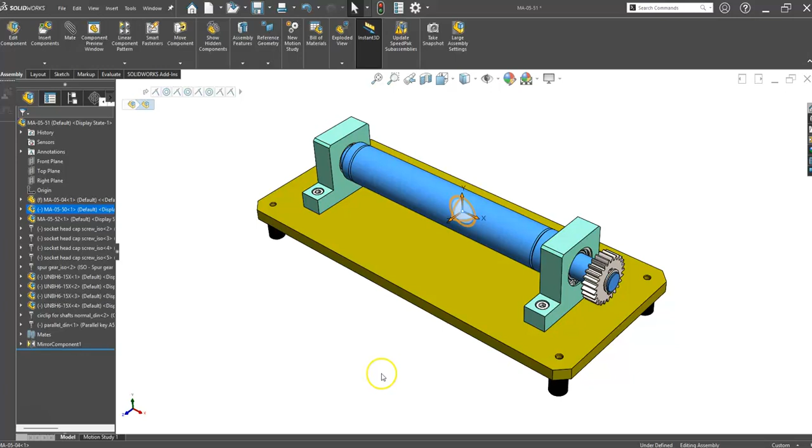Okay, we're looking at modeling up this full assembly here. First of all, we're going to start with a sub-assembly, which is going to be the roller, and go from there. So we'll start a new file, new assembly this time.

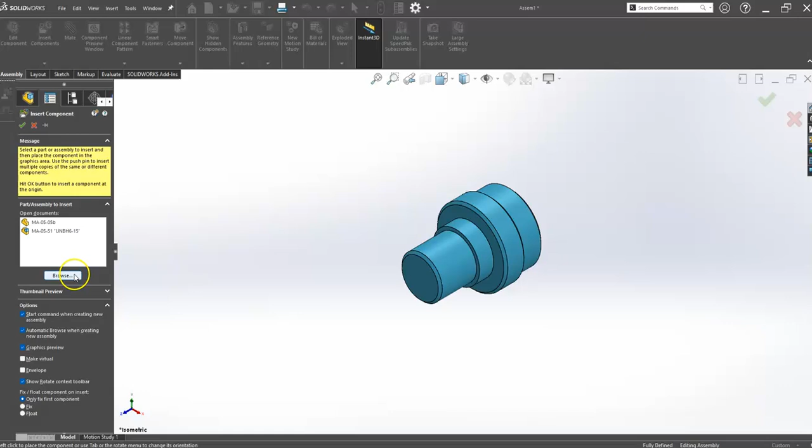And what we're going to do here is we're going to take in the components we need. So we can browse the new components here, and we're going to take in the two shafts that we need. So we're going to take in an end shaft. Just hit enter. We insert another component, and this time we're going to take in the roller that we've drawn.

So we don't have to rotate or anything, we're going straight into the mate. So the first part's in, and we notice there's an F in front of the part, which means the part's fixed, so it's really our reference part. So now we can mate the cylinder and the cylinder. Fine. And then we want to get our depth here.

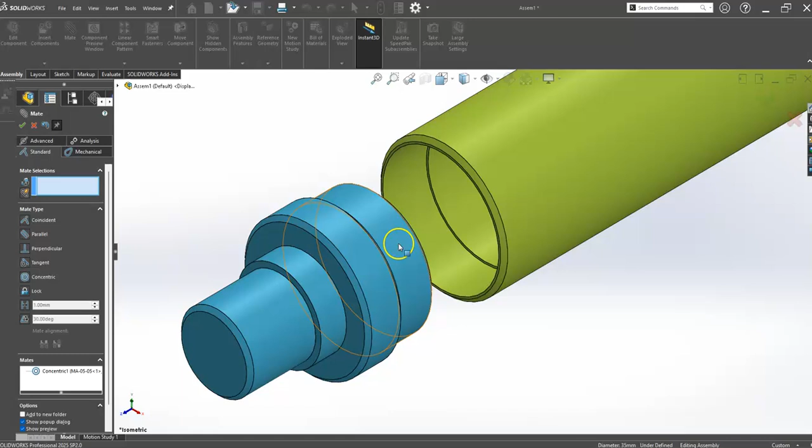So we have this part already prepared with a chamfer for welding, so we're just going to do the flat face at the end, spin around the stub shaft and pick the flat face there as well, and we're going to hit OK, and we can see now that they're butted up against each other with a bevel prepped for welding. So that's the mates completed for those two components.

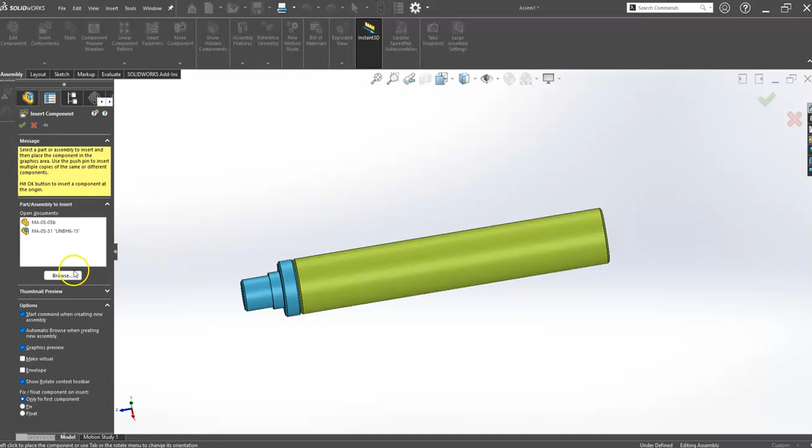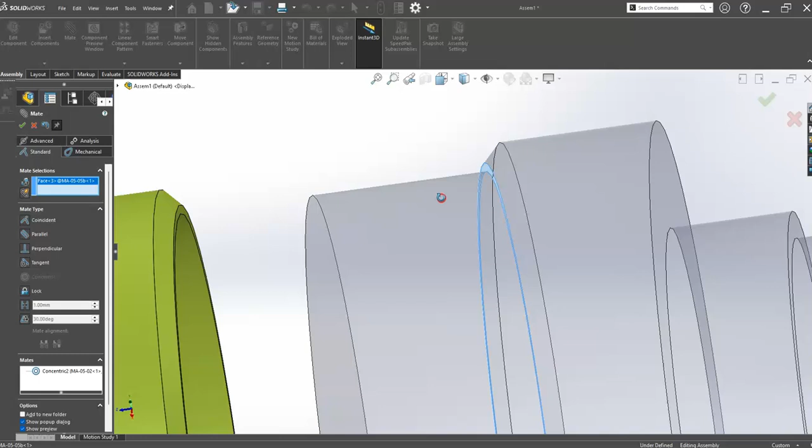We're going to take in the other shaft we drew a minute ago, so we insert components and we'll hit browse, or we can pick them off the list. This list here will be the parts you've opened, so you might see the part appearing there. So we'll use that part there. It's grey at the moment. We'll use our mate again, and again cylinder to cylinder, and we'll hit OK, and then flat face here at the back to the flat face of the roller, and OK.

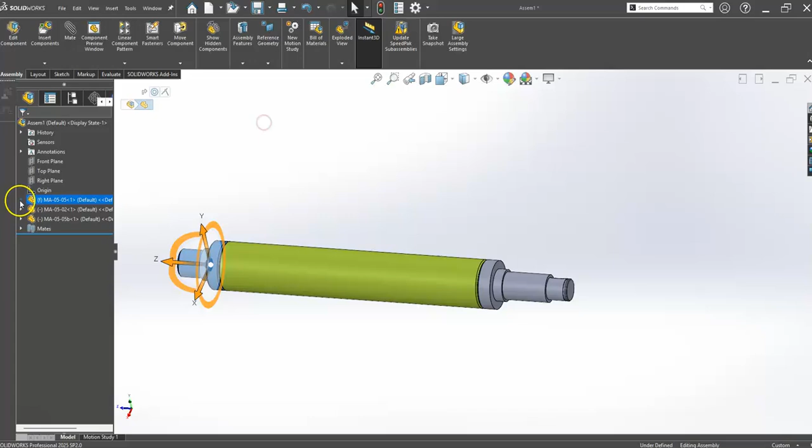Now the keyway we have modeled in that shaft is free to rotate at the minute, which mightn't be ideal, so we want to pin that down. So the best way to do that is to reference, if I just close off the mates there for example, the original part that we brought in, and not that front plane, this top plane for example. We're going to reference that with a plane on this part.

So we hit our mate, that's pre-selected, so we have that top plane selected, and if we expand down here, we can see our third part that we brought in, the grey shaft, and we'll go down here to see this front plane, and that would give us a reference. Okay, now the keyway is underneath, or maybe 90 degrees to what we want, so we could make that perpendicular instead of parallel, and it brings the keyway to the top. So it's defined where it is, which is better than not defined.

So that's a quick modeling of the roller. So I can save that as a new assembly. I'm just going to call that 50B in what I'm doing, and save it, the component. All right, so save again. So I'm going to create another new assembly here. So a new part and a new assembly.

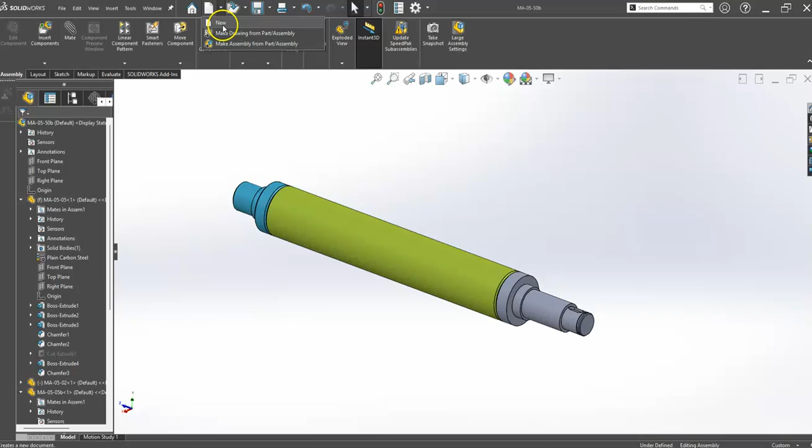And I'm going to take in all the components that I want. So again, I'm going to hit browse, and I'm going to take in a base plate here. So it's a good idea to take in a base plate as the reference part and hit enter. It doesn't move. Okay, and we can see now we can use its work planes as the work planes for referencing.

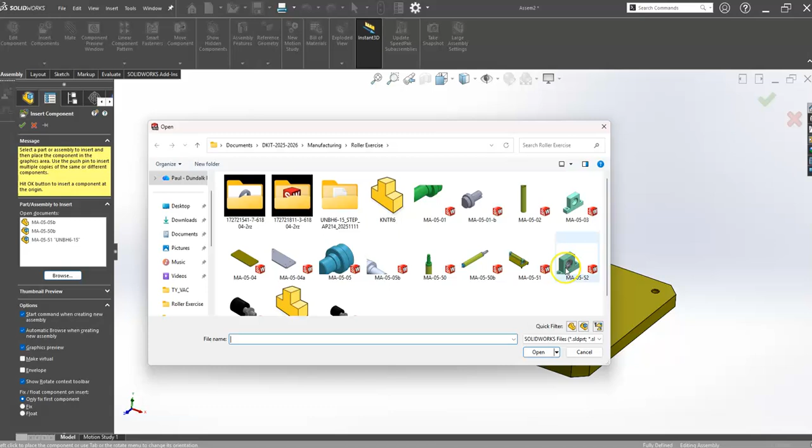So with our base plate in, we're going to take our second part in. So we can insert components and hit browse, and we can take in our bearing sub-assembly that we've done previously. Jump back and look at that. So it's the same basic kind of mate commands we'd have done before. We downloaded our bearing in class. So this sub-assembly then can be mated.

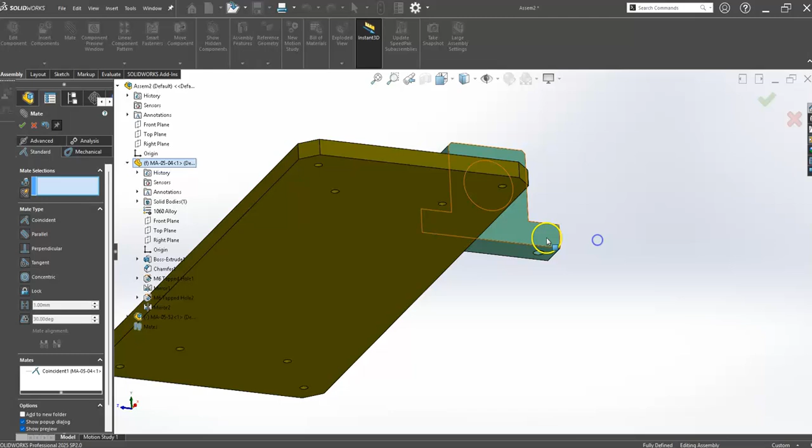So again, we can mate the face to the bottom face, and then we're going to mate the holes. Doesn't matter whether it's the bottom of the hole or the counterbore. The same thing to these threaded holes, and hit OK. And we'll do the same up here. We can do bore to bore and hit OK. So at least you know that they're fitting correctly. So that's that sub-assembly done.

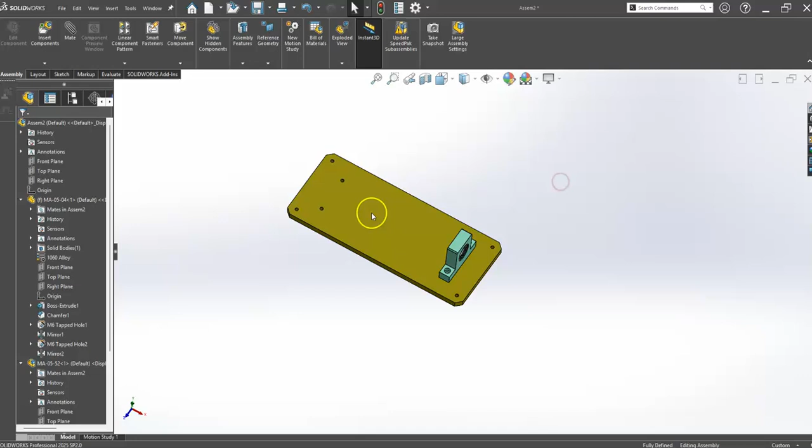You can take that sub-assembly in again, or we could mirror it across, which might be an interesting thing to do. So because I know these holes are symmetrical, I could mirror that across. So if I use the base plate I took in, the plane down the middle of the base plate should allow us to mirror. We could pattern as well, but if we know that these holes are equal, we don't have to do that.

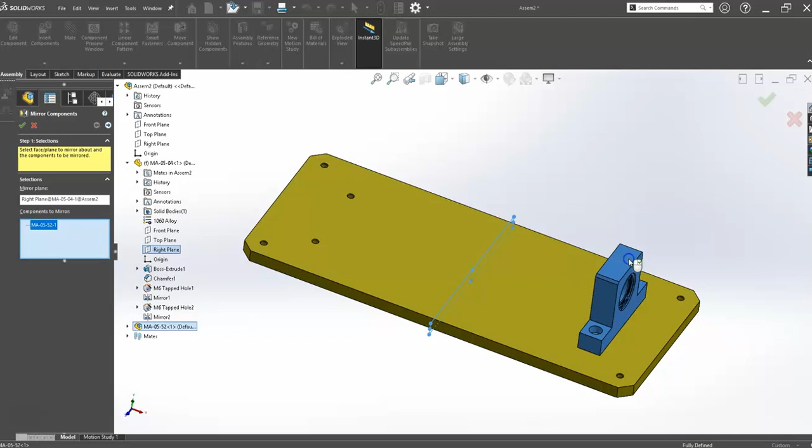So we can mirror the complete sub-assembly, and if we just hit next there, we'll see what the mirror command is doing. So the circlip is coming to the outside, and that's what we want to see, rather than the inside. So that's it mirrored like that. Now we can go and take in our roller that we've just done.

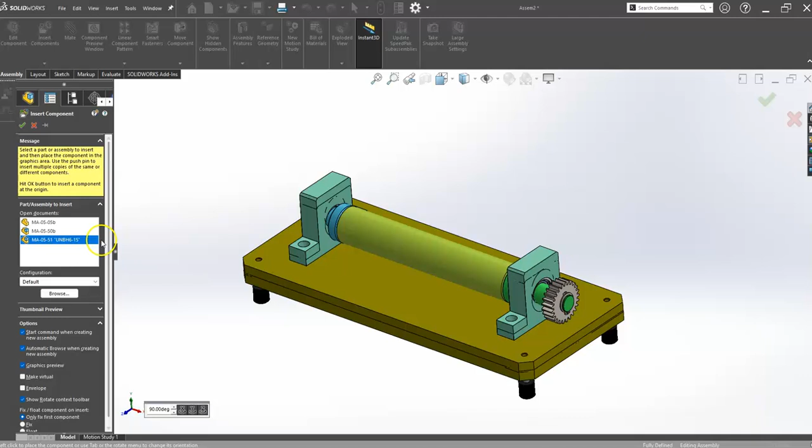Not that part, no, this one here. So we take in our roller, and again, we will go with our mates. We'll do shaft to bearing. That's okay, it's the wrong direction, but we'll flip it now in a second.

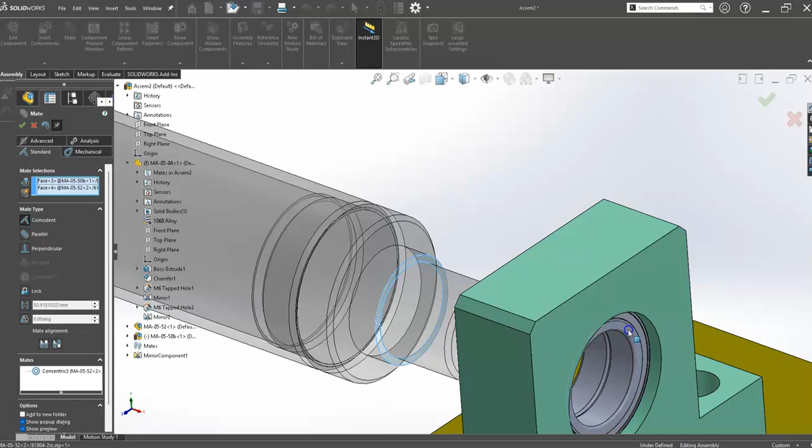What we might do then is we'll put the shoulder of the shaft up against the shoulder of the bearing. And now we're going to flip it using the flip mate command. Hit OK. And I'm going to hit OK. And now we can see that this here should be lined up as well. We can see there's probably a larger distance here than the other side, so we might go in and edit that. So let's check out what that distance is first and then go back and edit it.

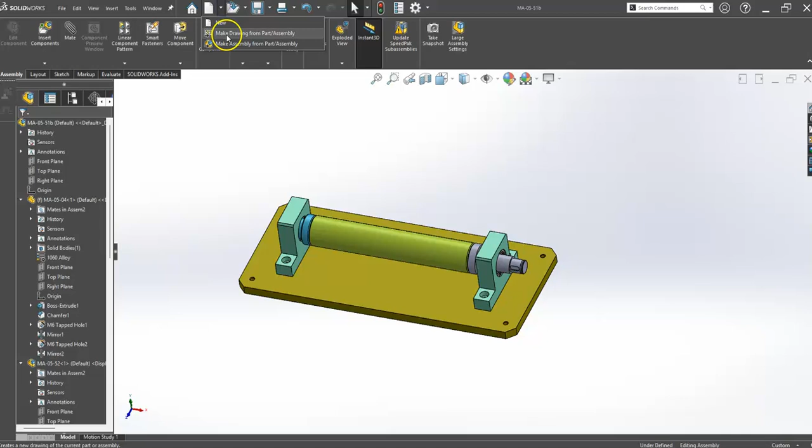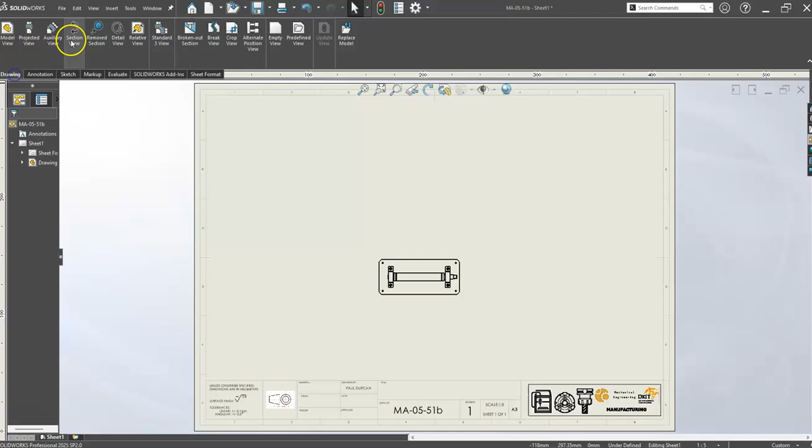So I might just save that quickly again as a part number, and what I'm going to do here is I'm going to create a new drawing and use the drawing to aid me in my design. So again, if I go to my view palette, I can go to my assembly here of the unit, and if I take a plan view here just really quickly, okay, and I'm going to do just a quick section view through the plan view just to help me lay out the part, and hit OK.

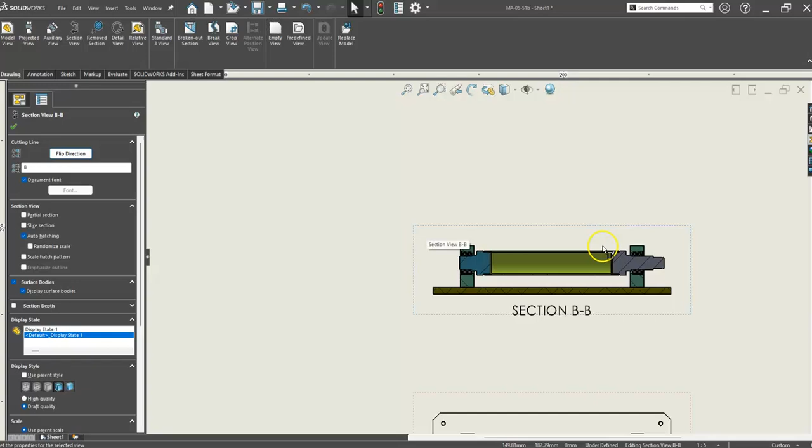And if I zoom in on this section view here, I can quickly see that I butted this shoulder up against the bearing, but over on the other side there's a bit of a gap, it's free to float. So I can check what size that is. It's 2 millimeters there. It's easy to check it there. So I'm going to go back and edit the mate and balance that out.

So if I go back into my assembly, where do I find that mate? I can find that mate if I close up all my parts here for a second. I can find it in the mate folder. But if I go to the roller assembly and expand it, I can see there's 2 mates in it. So it's not the concentric, it's the coincident mate. I can edit feature, and instead of being coincident, I can force it to be a dimension and make it 1 millimeter. So it's shifted 1 millimeter to the right. So hit OK with that.

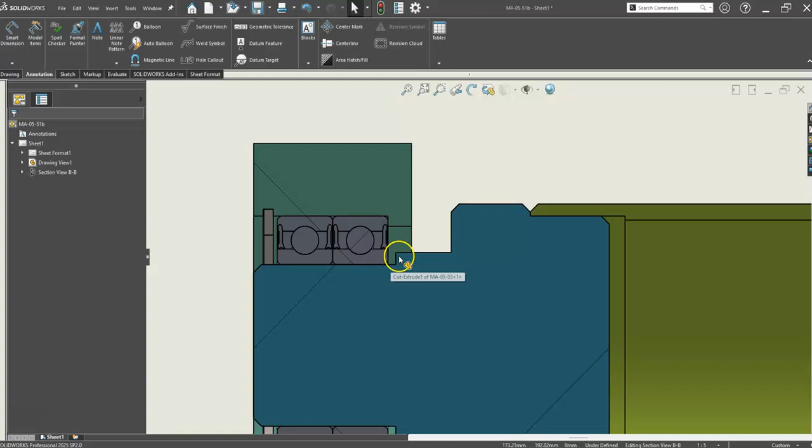I can save that, and I can just go back real quick and check that on the 2D view I have. Now it's gone to 1 millimeter space over here, and over the other side we have the 1 millimeter from the offset from the mate. So that's good to go. All right. So we're pretty good with that at the moment. What we want to look at is this is free to rotate. That's fine. We'll leave it free to rotate for the minute. It's the whole roller that's rotating.

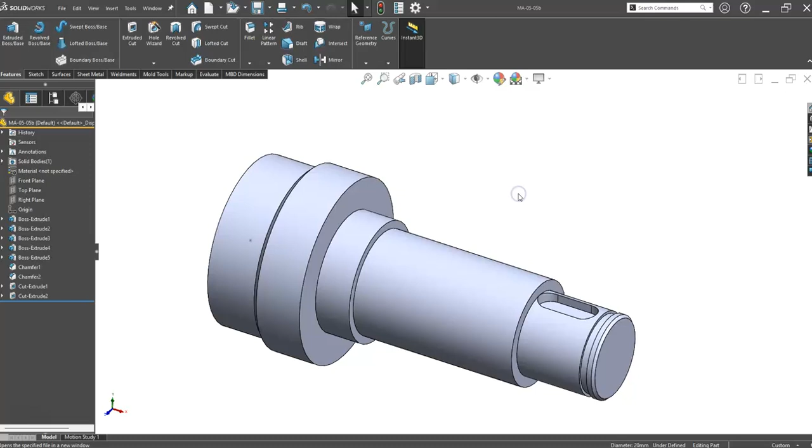What we want to add now is maybe the keyway, the key itself, and the gear at the end of this. So just to be clear there, I'm going to open up this part, right click, open part. I'm just going to change the color of that part just so I can see it versus the gear when I bring the gear in. So I save that, and I go back into my assembly here, just to have it orange so we can see it.

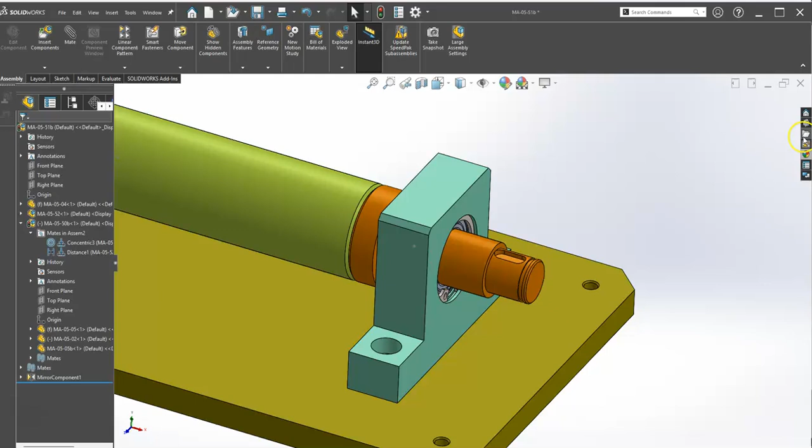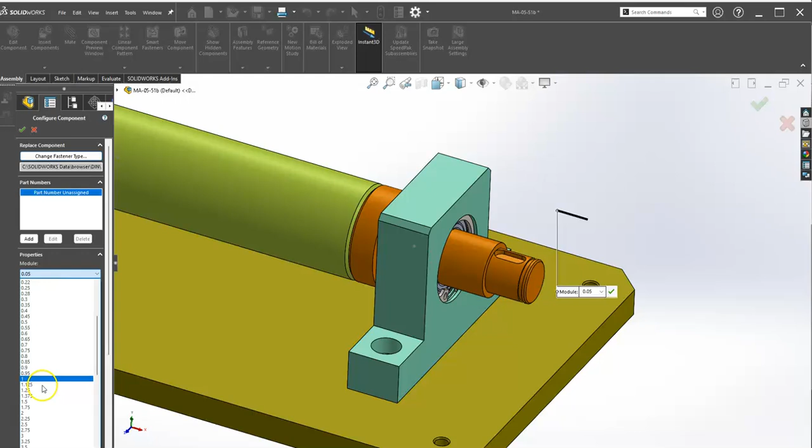So what I can do in SolidWorks here is I can use the Toolbox in SolidWorks, and what we can do here is we can do a few things. First of all, we'll take in the gear, and then we'll take in the nuts and bolts that we need. So we can go to DIN standards, power transmission, and gears, and it's a spur gear we want to take in. So we'll drag in the spur gear, and what we'll do is we'll pick a module of the gear, maybe a 1.5, down to 1.5, and we can do the number of teeth.

We can do 24, and we can leave face width. Okay, the shaft diameter then is going to match what we have, which is 16, and we can put in a keyway, a square 1 keyway on the 16 millimeter shaft. So that's the gear kind of defined here. We can always go back and edit that, and we'll hit OK, and we're going to place the gear then. We're going to just hit escape on the keyboard. We're just going to mate this gear manually, which is sometimes the handiest thing to do.

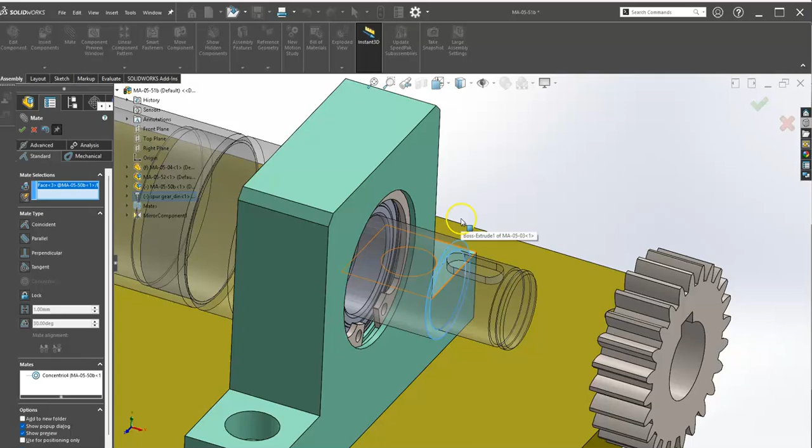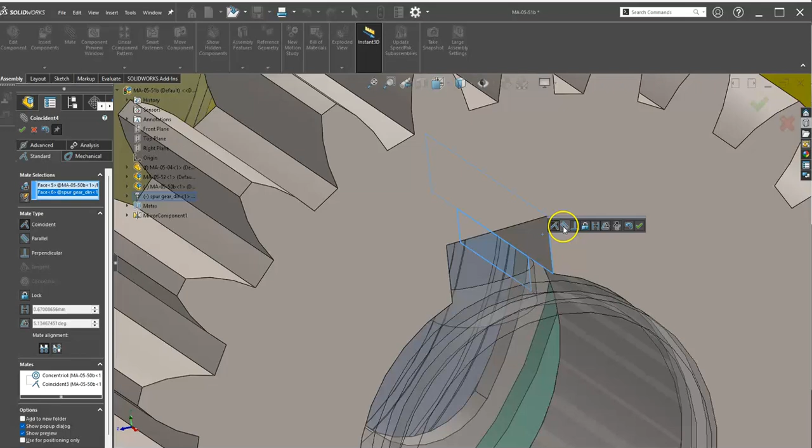Okay, so we'll do our mate again, cylinder to cylinder. Okay, we're going to drag that, left click the part and drag it forward so I can see it. Jump in here and cylinder to face, and hit OK. The next thing I want to do is I want to line the keyway up on the gear with the shaft. So if I pick the face and the face, I'm just going to make them parallel, not coincident, because if I open up the keyway and make it slightly larger, by 0.1, it won't be coincident. So I'm going to just make it parallel. And hit OK, and hit OK with that.

So that's the gear put into place. You can use any side of the gear, but for completeness, we want to put the key in. I'll right click on that and hide the part, so you can see it hid here on the list. I'll turn it back on because I just want to put a key in there, so I'm going to double check the size of that and hopefully we'll get a key here to match.

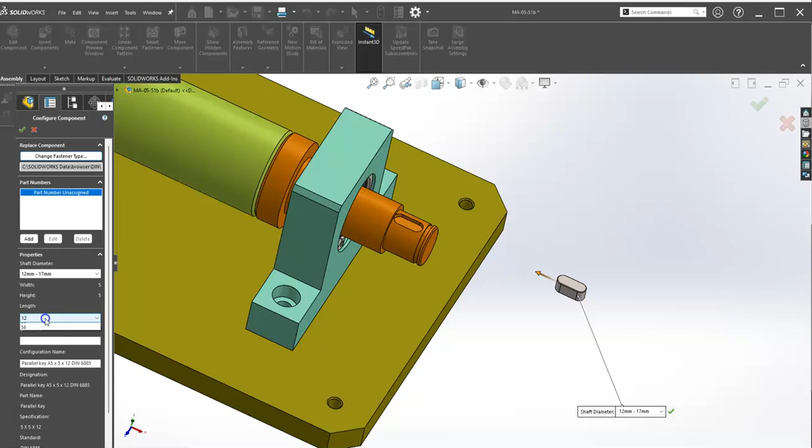In the DIN standards we have keys and parallel key, and 6885 is the standard. We'll drag that in. It's a shaft diameter of 12 to 17, and its length is 12, which should be okay. Hit OK with that - we had it loaded up before.

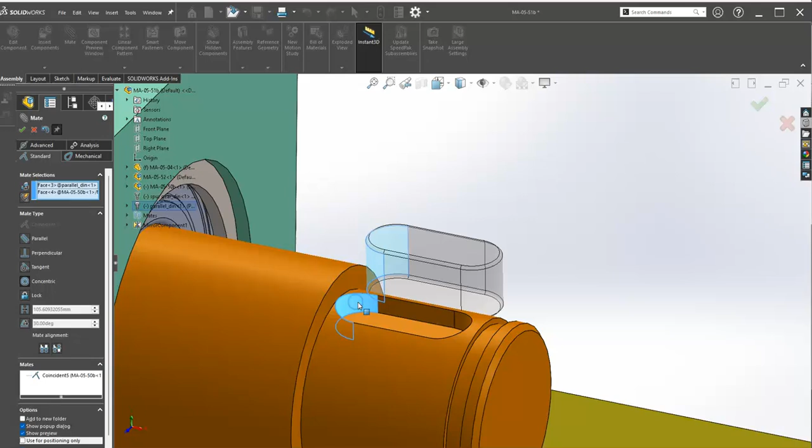Hit escape, and I'm manually going to mate this in. So I mate from the bottom face to the bottom face. Hit OK, and then I can do the back curve semicircle to this semicircle. I also need to do the front, semicircle to semicircle, and that will keep the key aligned and nice and square. So that key is pretty good.

I can go back to my model and spur gear, right click on it, and hit the eyeball for show components. So that's the key done.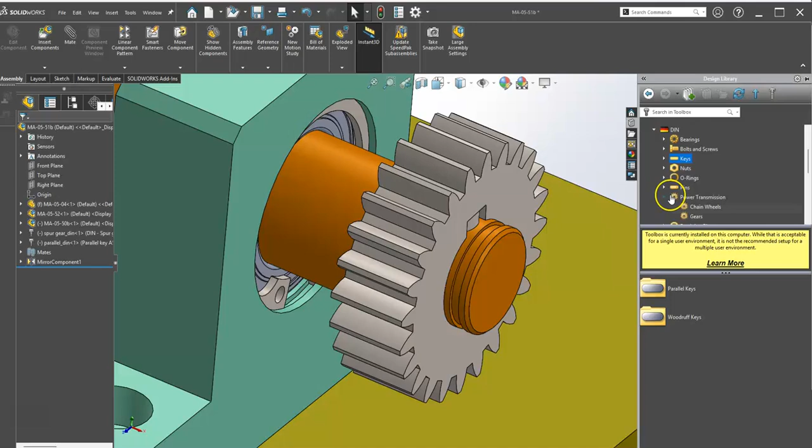The last thing we're going to do is finish off with a circlip. We've done circlips before for these other assemblies, but we'll do another one. So again, our retaining ring into our German standard - we should see retaining rings, external retaining ring, and a circlip normal is usually fine, with a diameter of 16 for the shaft. You'll see the size come up here on the groove width and thickness, etc. that you can use. So I can hit OK with that.

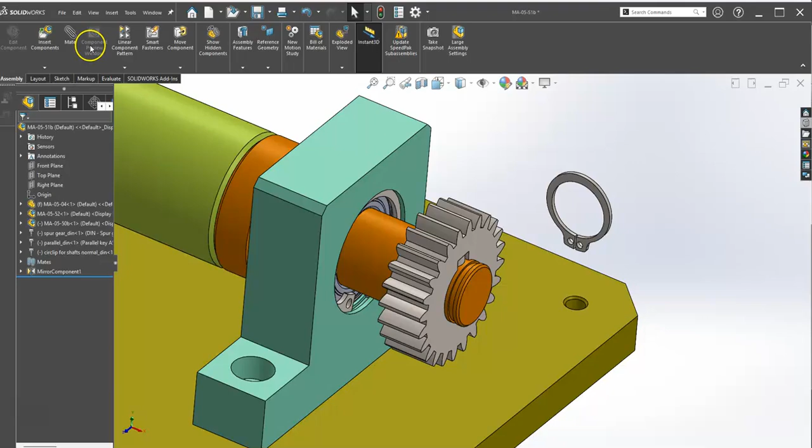I can hit escape and manually mate this in. I'm going to mate the back face of the groove with the back of the circlip, and then mate the inside circle with any cylinder on the shaft. That's the retaining ring in place. We can add to that again using our bolts.

We can change from DIN to ISO standard for our bolts and screws, and we're using hexagon socket screws here - a hexagon socket head - and we'll go with M6, with a length of 16. We're going to go with that. We can update them later if we're wrong, but we'll hit OK with that.

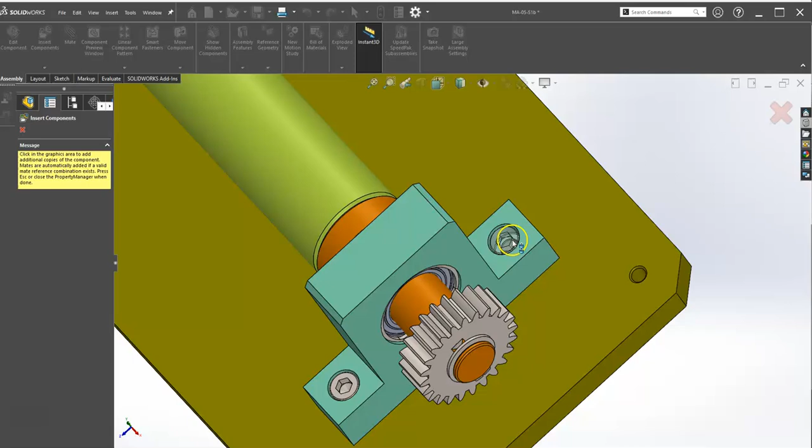I'll just place them in. They'll drop in automatically using the reference mate. I'll go back and delete that first one in a few moments. Use the reference mate, and use the reference mate again. That's the 4 bolts in place.

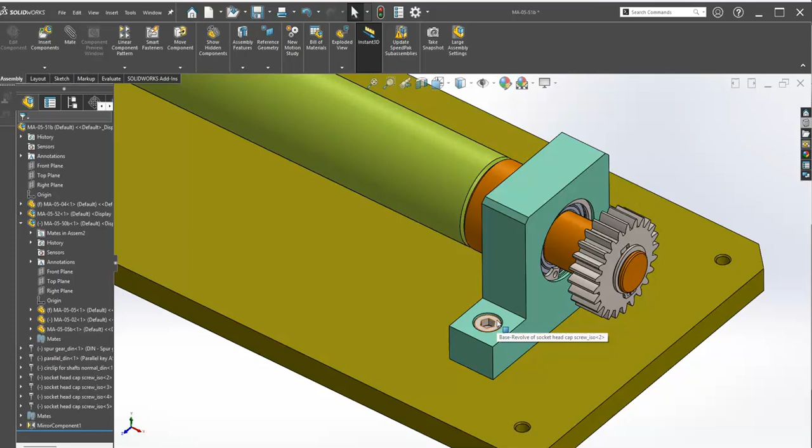Hit escape on the keyboard, pick that original one, and hit delete on the keyboard as well. So with the bolts in there, I can check if they're not long enough - I can make them longer, bring them in again and replace them if I wish. For example, they're only 16 millimeters long right now. What I can do is bring them back in again and change it from 16 millimeters to 20 millimeters long, then hit OK.

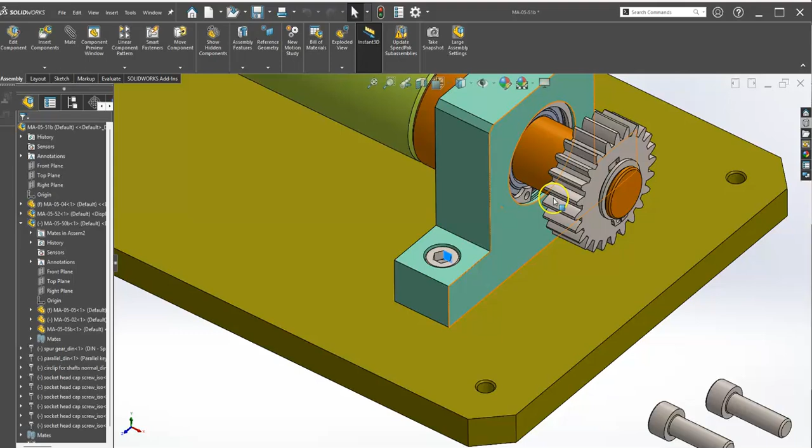That loads faster into memory on the assembly, which means I can go to each individual fastener and change them from 16 long to 20 long and hit OK. Same over here - select the fastener and change it from 16 to 20 long and hit OK. If I had a pattern, I'd only have to do it once, so that's an advantage of having a pattern when you're changing something. Again, select this version and make it 20 long.

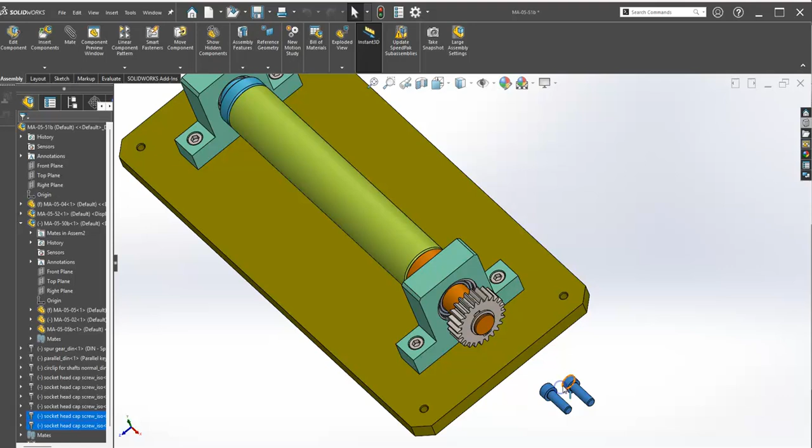And then delete these ones we brought in from memory. So that's the assembly done. There's two legs too we downloaded.

They're up in Moodle. I'll import them really quick - they're just wee pads or wee feet. These were them here, I think. So we downloaded them from Misumi.

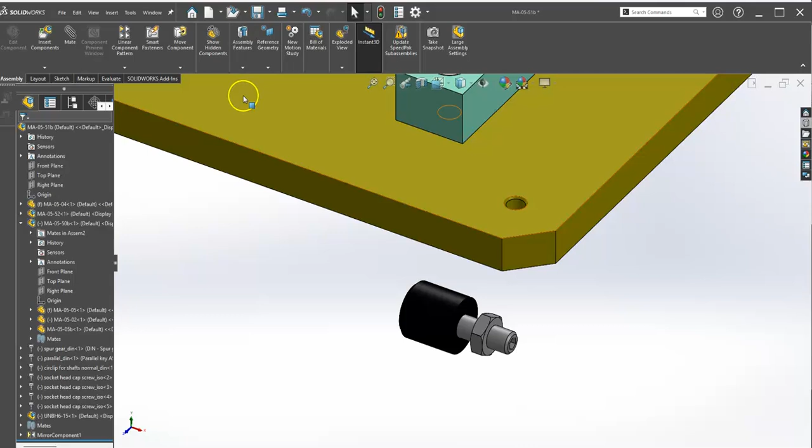They're up in Moodle. Again, it's a quick mate - the bottom face with the bottom of the plate, and the cylinder with the cylinder.

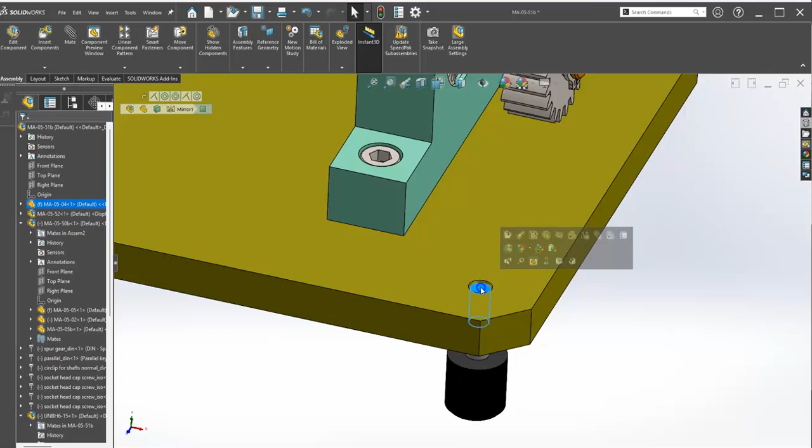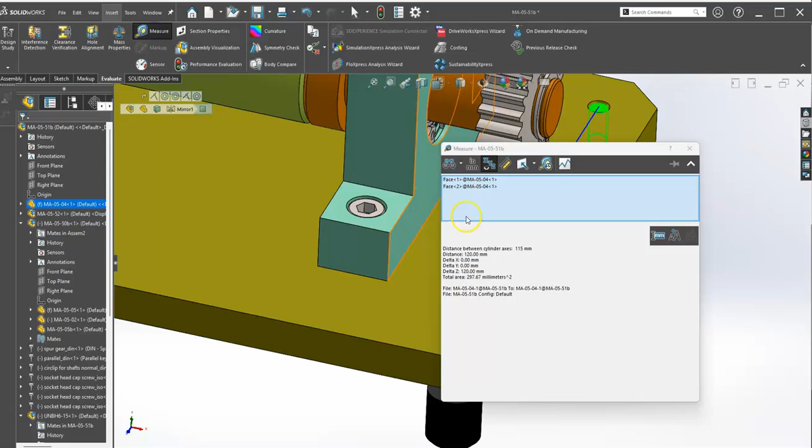If we know the size of the distance between the holes, we can pattern these, so I'll pattern them really quickly. I can select that hole and select that hole to get the distance between them, then hit evaluate, measure, and I see there's 320 between them on the x-axis. Again, select the cylinder, hold control, select the other cylinder, go up and hit measure - so 320 by 120. Let's pattern that instead of placing it 4 times.

So I go to assembly, linear pattern. My direction 1 is across the edge, across the front, which is going to be 320, and it's going to be 2 of them. My direction 2 is up this way, and it's going to be 120.